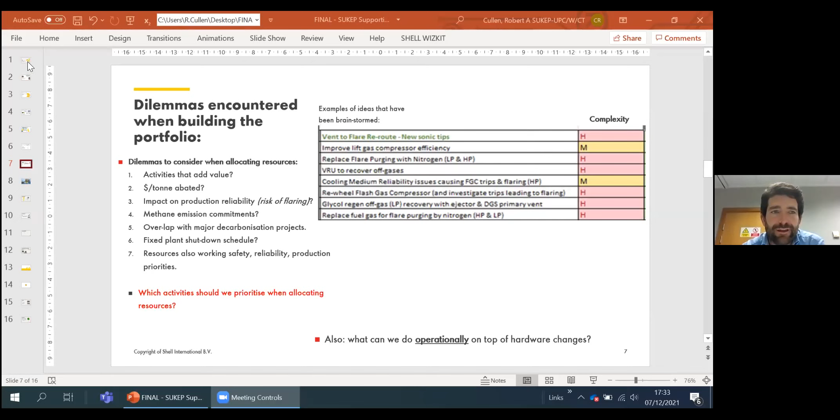Great, thanks Rebecca, much appreciated. I'll start sharing my screen now, and we'll get the slides going. Give me 2 seconds. Okay, just checking that everyone can see that okay. Yeah, I can see it. Just put that in presentation mode, so perfect. Excellent. Okay, and if you do keep me right, I've got the presenter pane over here blocking some of my slides, so I may have to move it around from time to time, but hopefully it'll be okay. Okay, well, thanks everyone for joining, much appreciated.

Tonight's discussion is going to be on Shell. Now I just need to move the pictures across because it was sitting over the title. So how Shell UK Upstream is supporting the UK oil and gas industry's decarbonisation commitments, and underlying that obviously is the commitments within the North Sea transition deal. So a very quick introduction to myself, and then I'll pass over to Chris, and then it'll be back to me for the first part of the presentation, and then Chris will take us through the latter part.

So from me, I'm a petroleum engineer by background. Well, I'm actually an electrical engineer prior to that, but realised it wasn't for me when I got a couple of years into that and ended up doing petroleum engineering. Been with Shell since I graduated in 2005, and worked across a large number of brownfield and greenfield assets here in the UK. I spent significant operational time in the North Sea, but also over in the US in the Midwest of Wyoming.

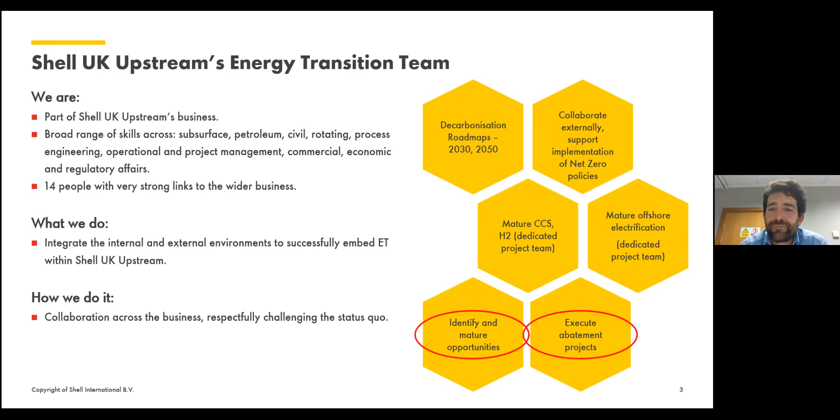So a little bit on the North Sea transition deal. It was a unique deal that was signed between OGUK on behalf of the upstream business in the UK and the regulator BEIS. There's 5 themes in it: supply decarbonisation, carbon capture, usage and storage, hydrogen, supply chain transformation, and people and skills. Tonight we'll definitely focus mostly on that first one. How do we decarbonise the oil and gas supply in the UK?

Maybe not everybody's aware, but the oil and gas business in the UK accounts for 4% of the entire GHG emissions. So the scope of this deal is significant at a national level. And it is quite satisfying when we can look at one individual activity within our portfolio and boil it down to point something of a % of the entire GHG for the UK. It is at that scale that we're working.

The North Sea transition deal is against a baseline of 2018, and the commitments made in it are there on the bullet points. You can see it's essentially 10% by 2025, 25% by 2027, and 50% by 2030 towards a net zero basin by 2050. I think the distinction between 25 and 27 is important. Essentially it's a recognition that the major decarbonisation projects like CCS and electrification won't be online by 2025. But there are assumptions built into those numbers that to get to 25% by 2027, at least a number of those major projects will need to be in place, and then that will accelerate out to 2030 to get to the 50%.

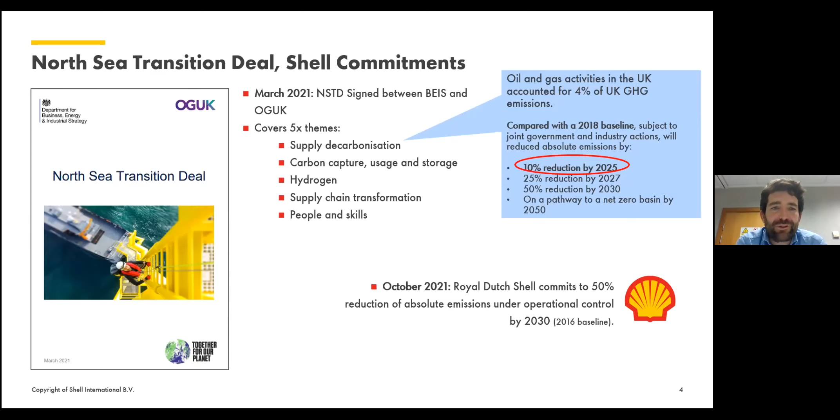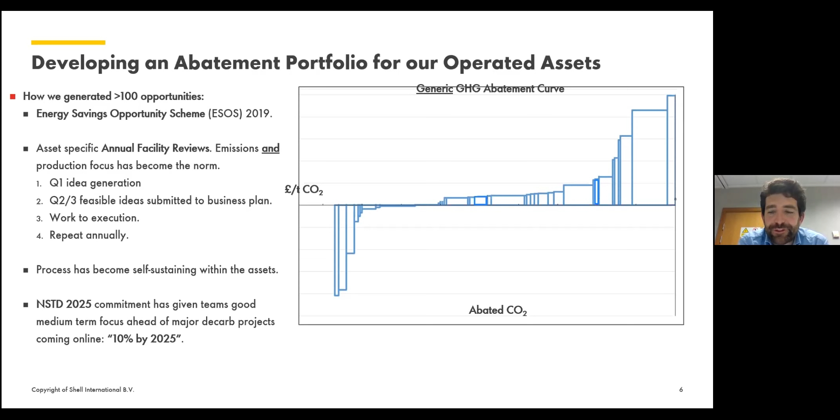I've got another minute or two, and then I'll hand over to Chris. But essentially, I just want to talk through some of the dilemmas that we've had to go through as we've been building this portfolio. I've taken a snapshot of some of the activities that have been assessed as potentially going into the portfolio. You can see it's a good mix of flaring activities, venting activities, rotating equipment activities, and process activities as well. So it's the full gamut of everything that causes us emissions.

But what do we actually do to decide which ones we're going to work? As I said, some of them actually add value. You will make money out of doing them. So, should we be doing those ones? Although they are more than likely the smaller ones. Should you rank these on a very simple metric of how much does it cost per ton abated?

But then some of them will have an impact on the reliability of the platform. So Chris will go into more detail on single generator operations. It sounds very attractive in that you simply switch off additional generation, but then do you increase the risk of tripping the plant and therefore flaring and therefore more emissions?

Some of these activities will be around methane. So anything to do with venting, for example, is methane, and obviously methane has its own commitments associated with it. Some of them will overlap with things like electrification or CCS. If you do anything on your power generation system offshore, if you're in a couple of years still planning to electrify that platform, well then would you still do both? These are the things we need to think about.

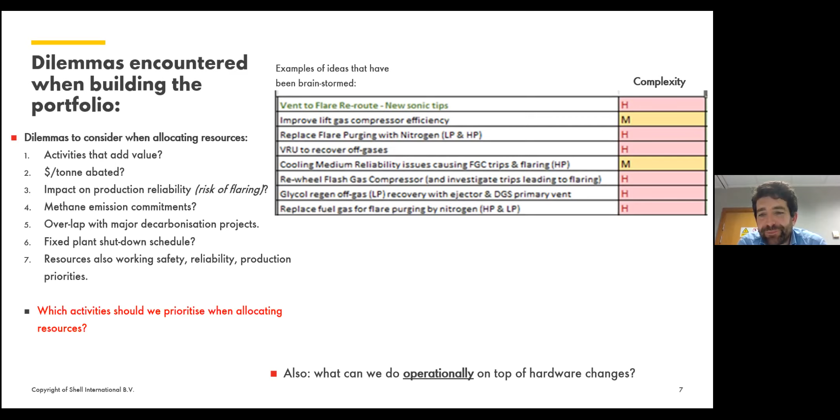And I'm also convinced that there's more we can do operationally. So in our day-to-day setup, how can we set our teams up in the plants, in the control rooms, so that they can see the impact of how they've set the plant up on that day, and then ask themselves the question, is there more that we could do, or could we do this differently? Rather than the expensive hardware changes that you see in the table above, I'm sure there's more we can do in that space as well. Okay, Chris, I've probably run over a little bit, but I'll hand over to you there.

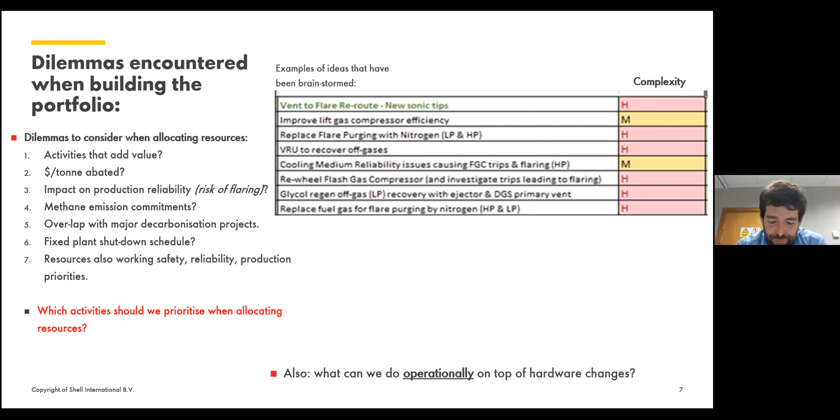No problem. So as Rob mentioned, and what he highlighted in the pie chart was that the majority of our emissions come from fuel gas, and most of that fuel gas is used to drive gas turbines, which provide power generation or compression power. So what are we focusing on to reduce emissions from rotating equipment? Across the portfolio of onshore and offshore assets, there are groups of opportunities that perhaps provide the best bang for buck, or the lowest hanging fruit.

And one of the largest opportunities we can see is to reduce the spinning reserve. And we can see that we could potentially replicate that from asset to asset. And I'll go into a bit more detail into exactly what that means further into this presentation. But essentially, it allows you to operate on a single gas turbine rather than operating, say, on 2 turbines or 3 turbines.

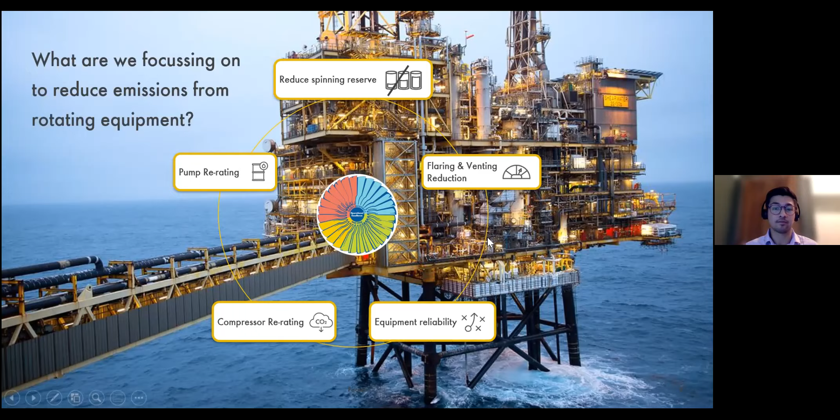So let's take a deeper dive into reducing spinning reserve. It's important to note that the efficiency for gas turbines, even relatively modern aeroderivative or light industrial gas turbines, is not particularly high. Small to medium GTs typically are around 25% to 30% thermal efficiency, which means basically almost 3/4 of the energy from fuel gas essentially goes straight up the exhaust.

So the key takeaway is that when you increase the load on a gas turbine, the better the efficiency. And the opportunity here is about looking at how we can influence how heavily loaded the machines are, or in more simplistic terms, can we run one gas turbine efficiently instead of two engines at lower efficiency?

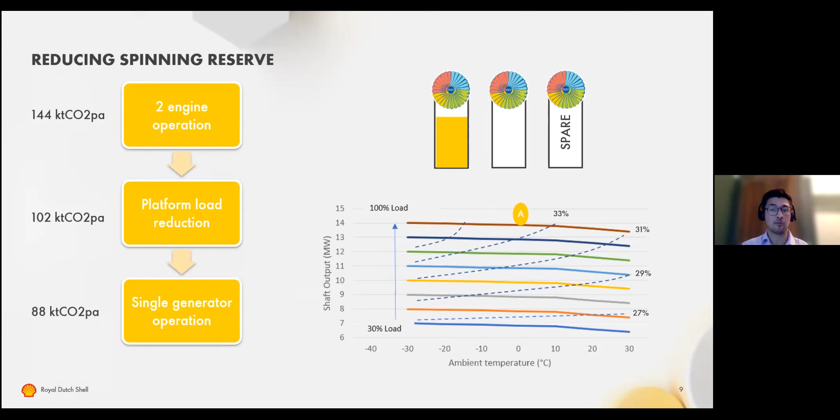So the spinning reserve concept is not actually a new concept. It comes up for discussion on a regular basis, and I think possibly the CO2 consideration gives renewed emphasis to it. It can be thought of as inertia, so essentially it helps to smooth out bumps. And one of the main issues is that spinning reserve aids trip tolerance or fault tolerance.

Those operating the plant will be primarily concerned with availability, because if you operate on one generator, you've got no backup, in inverted commas, to maintain the process online. Historically, you could have 2 engines running, and if one machine tripped, the second machine could immediately pick up the load.

So to help the business justification and put some numerical justification behind it, we looked at historical data on the deferment associated with the loss of power generation and the impact of trips on the platform. When you trip a platform, sometimes you flare, so there's an impact there, and we had to understand how many trips it would take before the fuel gas saving is essentially offset. Having that historical data really helps in having an objective discussion based on numbers.

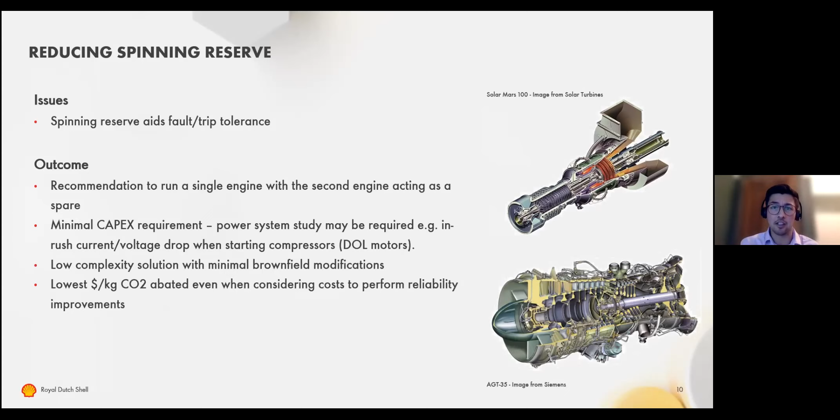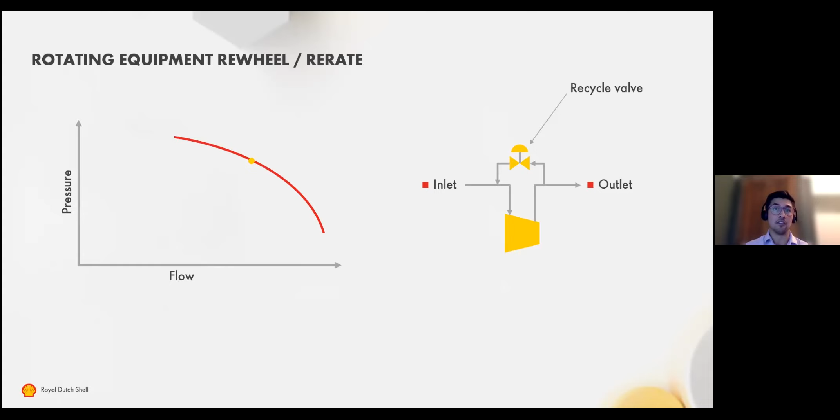So I'll just talk about another kind of theme that we're looking at, which is rotating equipment rewheeling, or re-rating, is the other way of describing it. Many offshore facilities have flash gas and export gas compressors, as well as oil export pumps, and these have all been designed for specific operating conditions, but over time they often end up oversized as reservoir flow rates start to reduce, production declines, and they basically end up in an operating point where it operates very inefficiently and on recycle. If you just click the next one, please, Rob.

So this is what happens in a lot of cases. The equipment will operate at the back end of the curve, and essentially it will recycle fluid through the machine, which leads to lots of wasted energy. If you click again, please, Rob.

What we do when we rewheel the equipment is we change out the compressor internals for an upgraded bundle, which has been designed for the new operating characteristics. And basically that allows us to operate with less recycle and also operate at the best efficiency point of that equipment. It's a great initiative and a great project because it normally doesn't involve many modifications to the plant outside

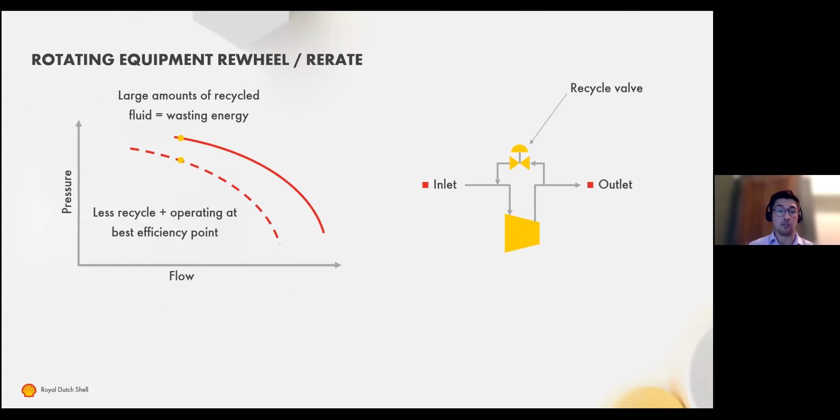of the compressor boundary. So you can execute this kind of activity in a turnaround or maybe an extended pit stop, and wherever possible, the surrounding equipment and the piping is retained. So you save in terms of cost and downtime. It's done to save energy, but it also can help debottlenecking or process changes. So there's also a good business justification there as well. You move to the next slide, please.

So just to give you kind of an idea of the impact of one particular project on one of our assets. So the project that happened this year, we had the compressor bundle changed on an offshore platform. The bundle itself is roughly £3 million, excluding all the engineering and design work that goes along with that project as well. But it obviously shows you that the actual material component cost is quite low.

The CO2 savings, so currently we're seeing 35,000 tons of CO2 per year reduction when the power is provided by 2 engines. And next year, when we operate on a single engine, that will further go up to 49,000 tons of CO2 per year reduction.

On the right, you can see this is kind of to try and paint the picture of the impact of the CO2 saving in everyday life. So 49,000 tons of CO2 per year is equivalent to 111,000 transatlantic flights from London Heathrow to JFK, or it's equivalent to turning off all of the houses in Peterhead, Inverurie, Fraserburgh, Westhill, Stonehaven, and Ellon. So dropping the load from 22 megawatts to 14.5 megawatts has a significant impact on our overall emissions profile.

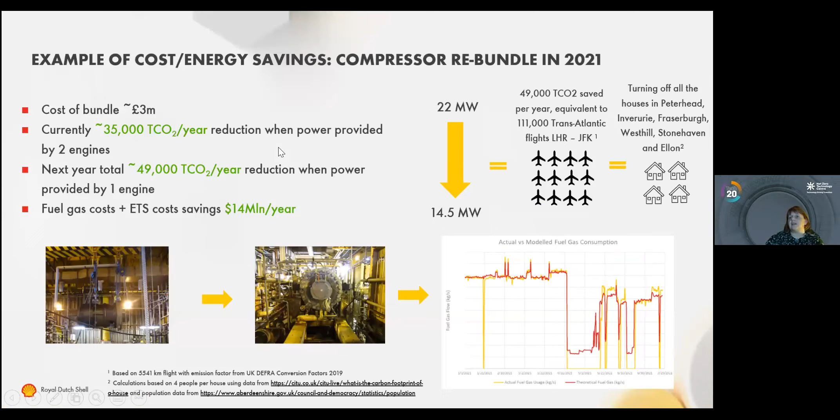We've just got a couple more minutes before we finish up, and I know we've concentrated very much on the rotating equipment side for you guys, but as Rob had said, when you did your donut, 16% of your emissions come from flaring and venting. So that's usually the other element that people look at from their emissions.

So it's maybe not so much in your remit or in your day-to-day, but are there any thoughts on what you're planning to do on that side of things, from the flaring and venting? Do you want me to answer, Rob? Maybe I'll talk. Yeah. I saw the comment coming through, so maybe just one thing to clarify.

So what we're looking at here is CO2 equivalent. So although that 5% is venting, if you did this on tons of methane and tons of CO2, that would be a much smaller number. But because of the higher climate impact of that methane, it gets bumped up in terms of CO2 equivalent. So in terms of climate impact, this donut takes account of the fact that some of it's methane, some of it's CO2, and in the flare there's also uncombusted methane that gets released as well. So all of that is worked out in the background into this donut. So that's just one thing to start on.

I think the other thing to note is that, although we've pushed quite hard on the rotating story here, there's another story going on in the background around flaring and venting, and we recognise we have probably just as many commitments made both internally and externally around flaring and venting, and that also feeds into that dilemma of which of these very important issues we should focus on first. Especially in the onshore space, where flaring is much more of a societal impact, visually and noise. Maybe there's other reasons why you might focus on those in the onshore environment than in the offshore environment. Chris, maybe you want to talk a little bit on some of the opportunities being worked.